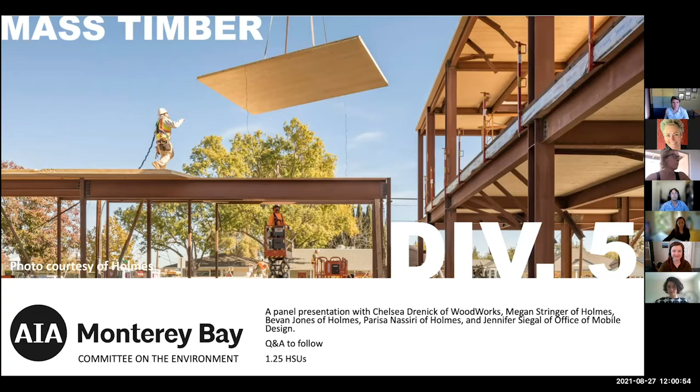I'm really excited today about our panelists. All are exceptional leaders in the world of mass timber who will speak to their knowledge of these wood systems. I've asked them to focus on the residential and small scale commercial sector, but also on its sustainability and safety benefits. Our hope with this series is that we can write more robust specs that specify low emitting materials, low carbon materials, durable without harm to the environment, and energy and resource conscious. Our previous lecture on green specs with Ann Hicks Harney gave an amazing overview on how we should approach our specs and listed many resources to assist us. Again, the link in the chat will take you to that talk.

Today, our panel includes Chelsea Drenick. Chelsea is a licensed structural engineer in the state of California. She received her bachelor's in science from Harvey Mudd College and a master's from Stanford. Chelsea spent 9 years in structural design consulting prior to joining Woodworks. Her experience is in a variety of sectors, including residential, higher education, and retrofit of existing and historic structures. She is passionate about sustainability and the use of wood as a building material to reduce the embodied carbon emissions of structures.

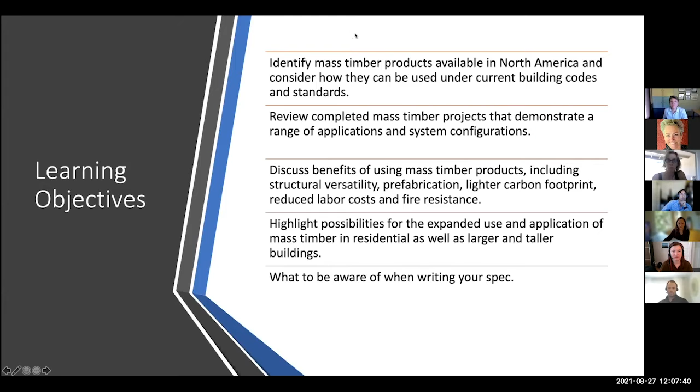Yes, excellent, thank you. Hello everyone, thank you for coming and thank you for having me. I'm Chelsea Drenick, Woodworks Regional Director for Northern California, Nevada, and Utah. Today we'll be discussing mass timber construction, products, performance, and design.

A quick word about Woodworks and what we do before I jump into my presentation. Woodworks is a nonprofit organization dedicated to helping project teams design and construct wood buildings. We do a lot of presentations like this, and I do lunch and learns for offices. All our presentations are AIA accredited, so please reach out if interested. We also do free wood design assistance to architects, engineers, and others in the building industry. Our goal is to help make wood buildings successful.

So as Libby said, I'm Chelsea Drenick, the main point of contact if you're in Northern California. My colleague Mike is in Southern California if you're located there. We provide assistance based on where designers are located so that we get to know local codes and get to know designers in our regions. Reach out if you have any questions, and I'll put my email in the chat once I'm done with this.

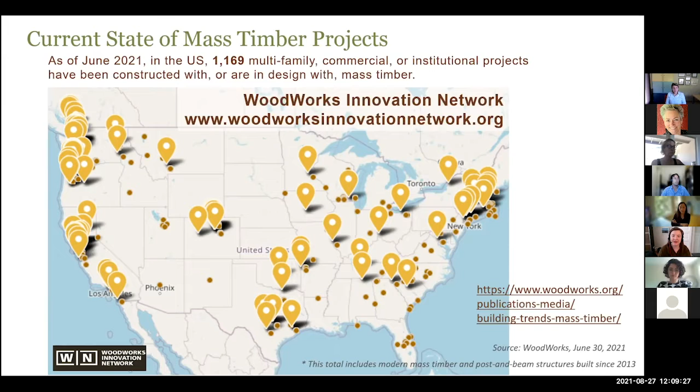Because we're talking about mass timber, I wanted to share the Woodworks Innovation Network. Our project assistance is confidential, but we wanted something that would allow folks to showcase their projects and connect with other experienced professionals. We're also tracking mass timber projects in design and construction—over 1,000 here in the US since we started tracking in 2013. Really exciting to see.

So I'm going to do a quick mass timber overview before turning it over to Holmes, looking at what mass timber products are and a few brief design considerations.

So, mass timber construction—I like to think of the delineation between mass timber and heavy timber. Heavy timber construction involves a solid wood member, a solid 8x8 piece of wood for a column, a solid 10x14 beam. Mass timber can have these same sizes, but it's made up of a number of smaller pieces laminated together using adhesives, nails, screws, or another type of mechanical fastening.

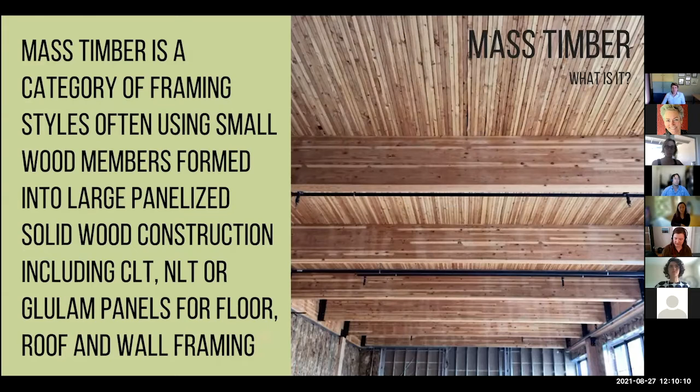We can use commodity lumber products, perhaps even lower grade products using smaller diameter trees, to still produce these large size elements—columns, beams, panels.

So mass timber buildings have a lot of different options for design. I think most common is post and beam, shown on the left, common for office buildings. Post and beam are typically glulam, but they could be solid sawn, LVL, or another type of engineered wood product.

Flat plate CLT is shown in the center, where we're using CLT as a two-way span, similar to flat plate concrete construction. Looking down this photo, you see there's no beams, only CLT and posts, so we have a tighter grid spacing here. We've seen it more commonly used for residential—the grid spacing shown here is 9 by 13.

It's a photo here of Brock Commons, a student housing project in Canada. On the right is honeycomb, more common in Europe—honeycomb or house of cards style construction, where both the vertical bearing systems, those walls, and the horizontal decks, or floors and roofs, are all mass timber.

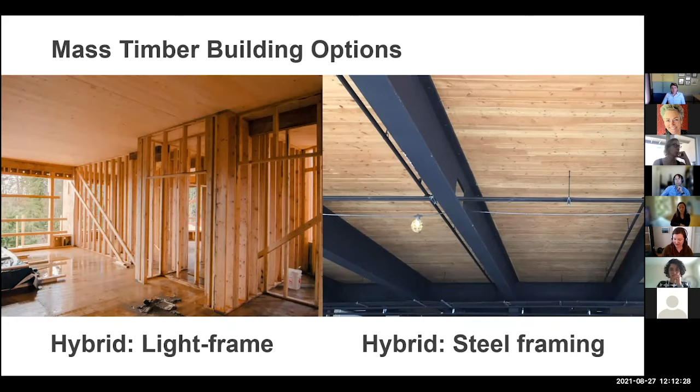All right, so of those four framing styles, we saw a number of products and introduced those briefly as well.

Glue laminated timber, glulam, are posts and beams typically of these buildings. Very simply, 2x glued together, then planed down. It's been around for 100 years. We use it in light frame construction for those longer spans. It can be hidden in a wall, then we have an industrial grade typically, or it's exposed in an architectural grade. So very common, as I said, for the posts and beams.

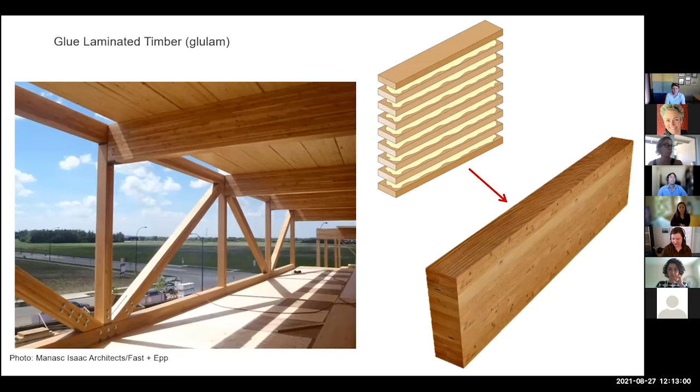Nail laminated timber, NLT. This is a combination of 2x members, usually 2x4s, 2x6, 2x8, oriented on their narrow face, so the strong axis is in the downward direction. Multiple laminations laid up side by side, each nailed to the previous. We usually use these for horizontal applications, the floors and roofs, and we're always going to be adding plywood or OSB to the top face so we can have that in-plane shear capacity.

NLT is really interesting because it can be prefabricated offsite or built on site. It's been in the code for a long time as mechanically laminated decking, very prescriptive, and it's very different from other mass timber products that are always prefabricated by a manufacturer. So NLT was more popular when the mass timber supply chain was less mature. Now there's a number of CLT suppliers across the country, across North America and Europe, so for larger projects it's much more cost effective to use a prefabricated panel.

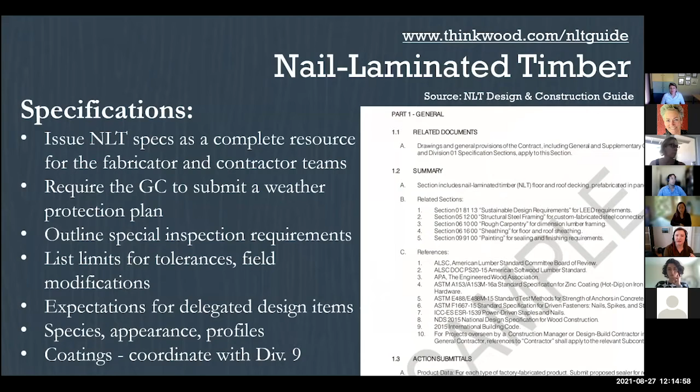All right, so I wanted to include this here, the nail laminated timber design guide, free from Think Wood. I can put a link to this in the chat as well. If you're interested in nail laminated timber, it's a great guide that goes through design considerations, and it also has an example specification at the end.

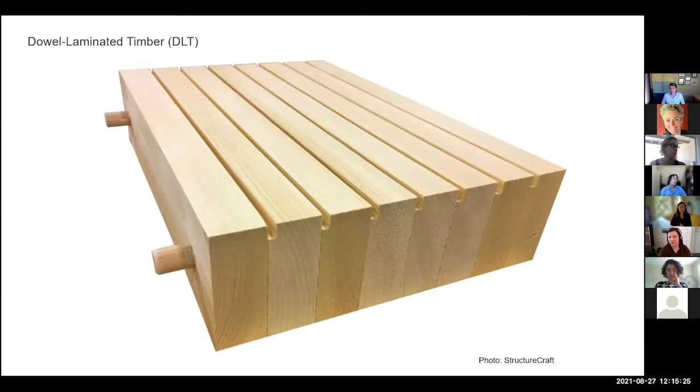Dowel laminated timber, DLT, is very similar to NLT in terms of members that make it up, 2x vertically oriented. The difference here is instead of nails, we're using hardwood dowels to mechanically fasten these laminations together. So no glue, no nails, just wood. There is one dedicated DLT manufacturer in North America, and that is StructureCraft. This is not something that can be easily built on site.

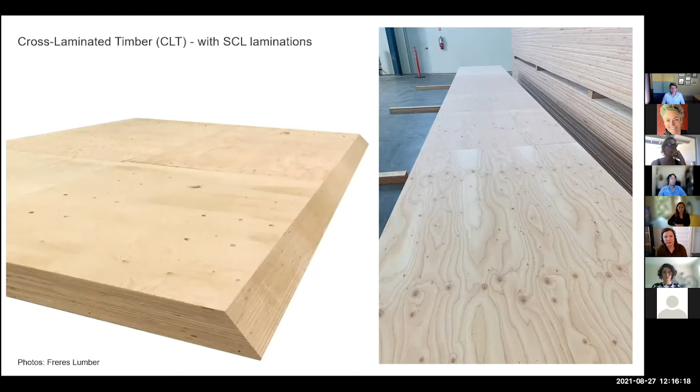A cool thing too is there's now CLT with structural composite lumber laminations. This is a product from Freres Lumber up in Oregon called Mass Plywood Panel, MPP for short. So basically really big plywood, layers of plywood glued together to make these large plates. And they can also cut it and make beams and columns out of it as well. So it's a different finish, but still CLT per code.

The contractor said it was originally designed with a light frame for the floors, using TJI joists, with a 14-month schedule. When they switched to MPP, it was cut down to a 10-month window. The contractor, Scott with Garnet Point, has talked about this project a lot, and there are some great webinars online if you'd like to learn more.

Back to our typical CLT with solid sawn pieces. CLT is typically formed by taking 2x boards side by side, laying them down, putting adhesive down, and then the next layer is cross-oriented, 90 degrees to the first, and so on, usually with an odd number of plies: 3 ply, 5 ply, 7 ply. The outer plies run the long direction, the strength axis, while the other direction is the minor or weak axis. So we do have strength in 2 directions, unlike NLT and DLT.

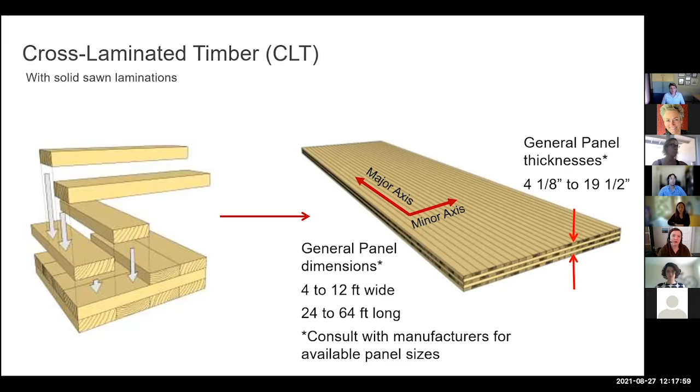That's how we can have that flat floor plate construction that I showed earlier. But in one direction, you're always going to have a shorter span than the other.

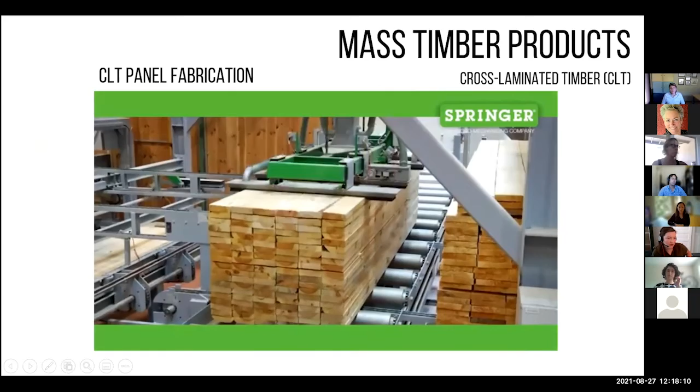I have a cool video here to show you how CLT is made. We're starting with a commodity lumber product, this is 2x, and the first thing they do is finger joint them end on end so we can have longer panels, typically 40 to 60 feet long. These longer pieces are then cut to size. Each CLT panel is made for a specific location on a specific project.

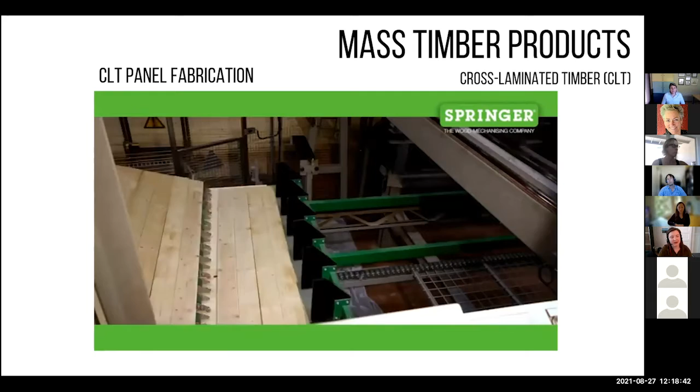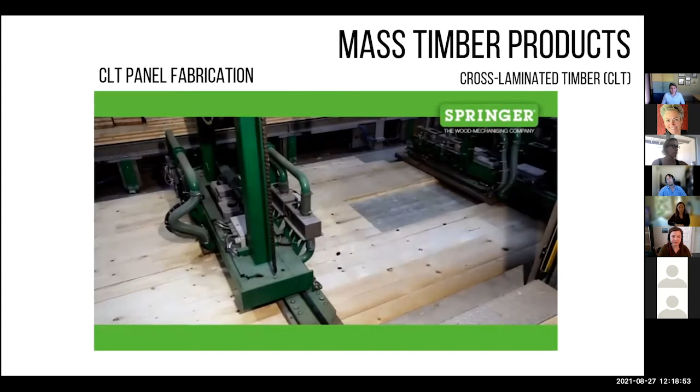Here they're putting those plies into place, then getting the adhesive on for the second layer. Here there's a diaphragm opening, probably for an MEP penetration, and you can see the specific size of the panel made for a specific location. Then it gets pressed and goes through the planer, so here we're going to have a 3-ply panel.

Noted panels are about 4 to 12 feet wide, 40 to 60 feet long, and that depends on the manufacturer, since each manufacturer has a different size press. So it's important to engage with manufacturers early on if possible. If not, make sure there's room for adjustment once a manufacturer is selected.

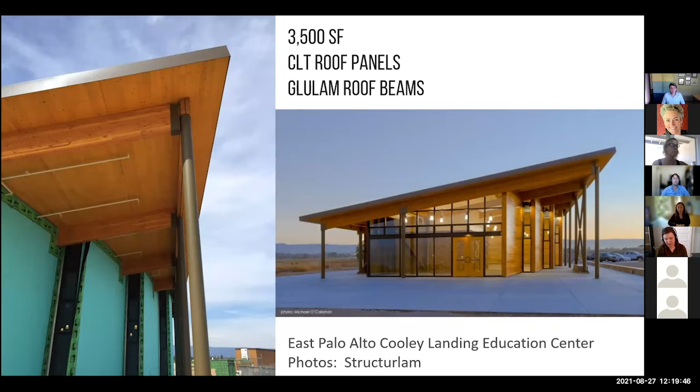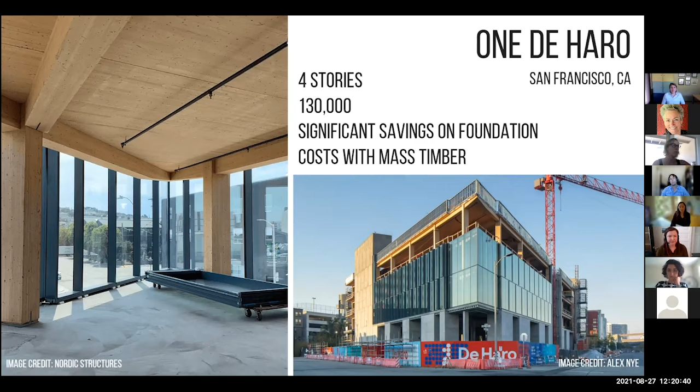Another local project here in San Francisco, very close to opening, which is cool. It's a 4-story office building, 3 stories of mass timber over a 1-story concrete podium. I like to show this one because one of the main reasons they went with mass timber was significant savings on foundation costs. Mass timber is much lighter weight, so comparing it to a concrete building, they were able to reduce their piles by about 50%. Very cool, and a good option for poor soil sites.

Talking about connections: these will include a lot of small diameter self-tapping screws, along with proprietary or custom fabricated beam and column hardware, kind of a new vocabulary of connections. There are lots of different shapes and sizes for these timber self-tapping screws. I was on a project site recently, and they had like 40 different sizes of screws, a bit too many I think, but it's kind of amazing all the different screws that are used. There's also an ever-improving market of tools to install these longer fasteners more easily and accurately.

Things to think about are shrinkage - think about that beam shrinkage, we don't want it to accumulate over the height of the building. And also fire design of connections, which we have a lot of experts here from Holmes to talk about as well.

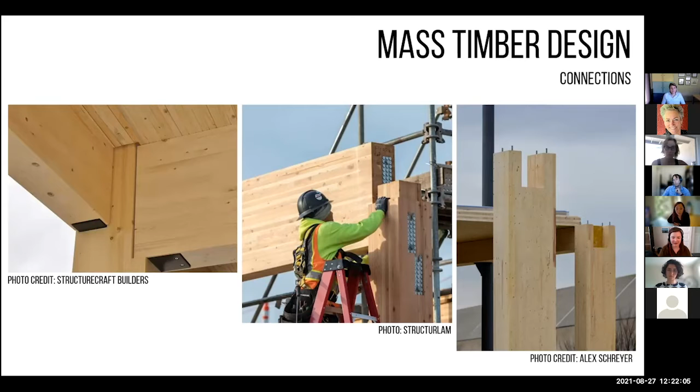Lateral systems - code process turns slowly. So we're working on getting CLT shear walls into the code, and there are design provisions, but there's no R value yet, so we're almost there. There are some projects using CLT shear walls, depending on an open-minded jurisdiction and a performance-based design - seeing them on some smaller projects. But typically for larger buildings, for office buildings, we're seeing steel or concrete used. One thing to consider with these is flexibility in the detailing for tolerance difference between the materials. Or for residential, smaller projects, light frame shear walls - our typical wood shear wall design works great as well.

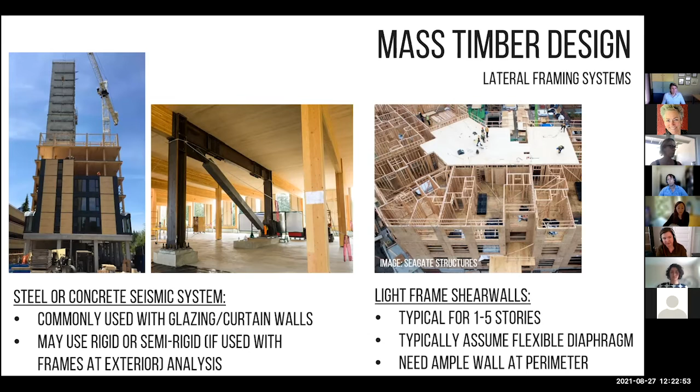The exciting thing is for CLT, recently released code - the SDPWS, special design provision for wind and seismic, the 2021 version, does have provisions for using the CLT as a diaphragm for seismic loading. So we're still going to have a surface spline here, plywood spline connecting the panels. That's not adopted by the CBC yet, but we are seeing a lot of jurisdictions allow this approach.

All right, acoustics - so lightweightness of CLT panels. It works for us for structural design, more efficient seismic systems, and the construction of the building - lighter weight, smaller foundations. But it works against us for acoustics. So we won't just have a bare CLT panel - typically we're exposing the ceiling and then we have finish on top. Part of the reason for that too is it's a softwood product, CLT - you don't want to leave that top surface exposed. As soon as someone starts wheeling a chair over it or walking across it with boots, it's going to be damaged. It's a strong material, but it's not super durable for that.

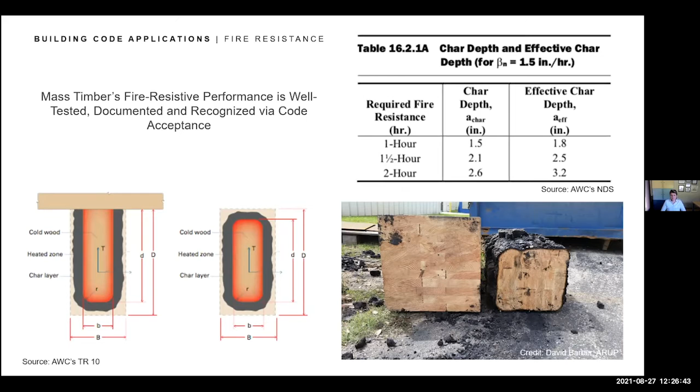So that's kind of a context for what projects will look like, what the products are. I kind of just wanted to touch on why we want to use mass timber. What are the benefits here?

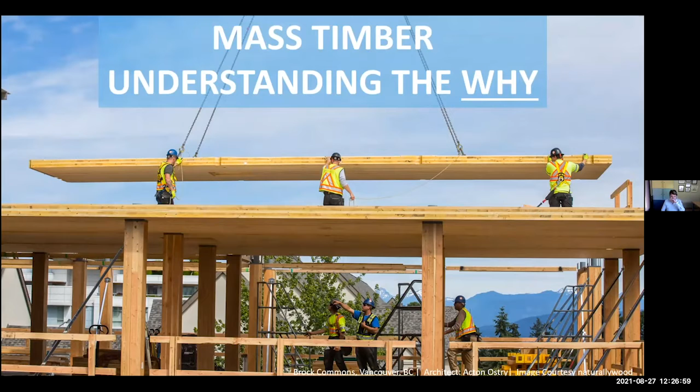Our global population is increasing. Where do we house everyone? Where will they work? How will climate change impact where people can live and work? So we need more buildings, we need more housing. We know that here in California for sure.

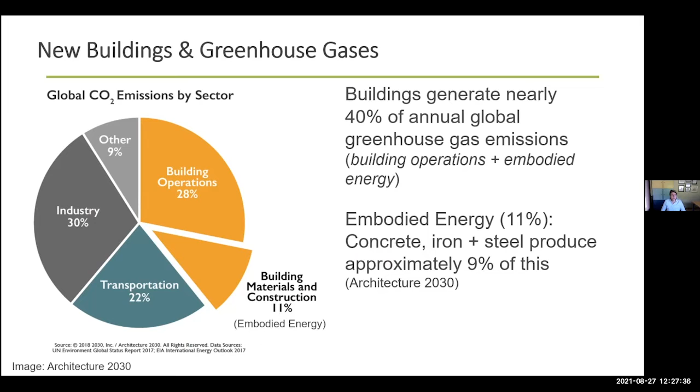Buildings generate nearly 40% of annual global greenhouse gas emissions. That's what we're seeing in the yellow pieces of this pie here. 28% is building operations, 11% is embodied carbon emissions. Embodied carbon emissions is when a building is built, how much CO2 is released due to its materials and construction.

Operational emissions are only improving with greener grids, more efficient heating and cooling. Embodied energy is not insignificant, and it doesn't have to be this necessary evil of building a new building.

So one thing that can help with that is wood. Wood is 49% carbon by mass or weight. In other words, approximately 50% of this wood is carbon that was in our atmosphere, contributing to global warming. It's now physically converted into a solid form of wood and put into the building. Whole building life cycle assessments typically show wood buildings as a way to reduce the embodied carbon footprint of a building.

This is a long and complicated discussion too. I actually did a talk yesterday at AIA California on wood and carbon and some vocabulary around that. So if you're interested in more, that will be posted shortly to the AIA California website.

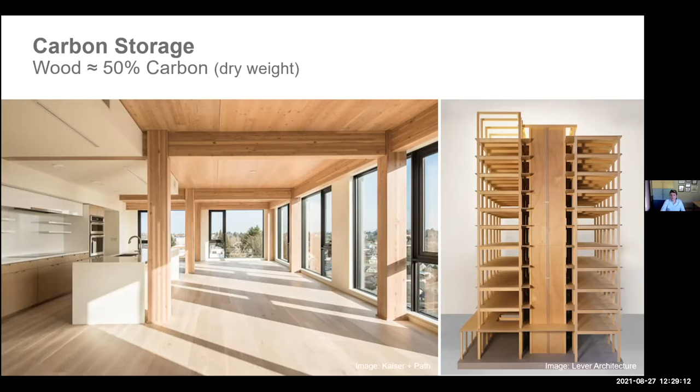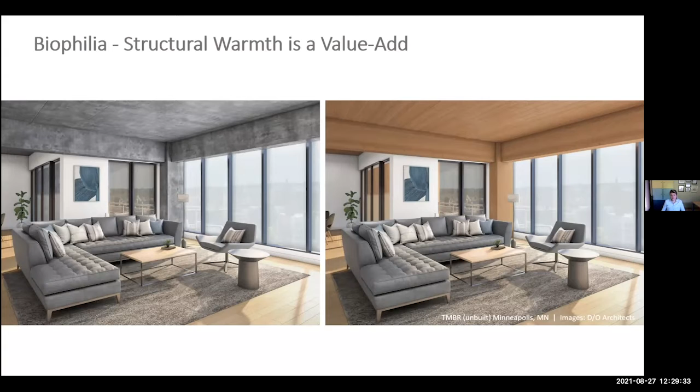Construction impacts. We know labor availability is a challenge right now in the construction industry. Mass timber is a way to integrate off-site construction. Then the crew on-site could be smaller, and we're creating more jobs offsite in a more safe work environment.

This point is tied to the previous. Compressing construction schedules will reduce the requirements of labor on site, requiring less time of folks on site. Time is money, mass timber helps with this. It requires a lot of coordination up front, but then when it gets to site, it's like a set of Legos or IKEA furniture. It goes up very quickly.

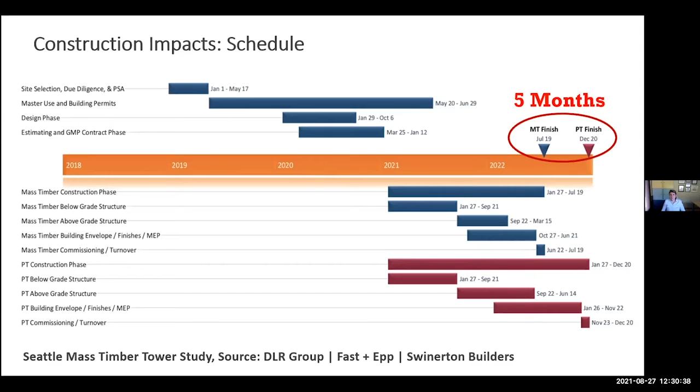So those are sort of the market drivers that we see for mass timber. I talked about construction efficiency and speed, construction site constraints for infill or urban infill projects. I mentioned Project 1 in Oakland, how they could install things directly from the truck. Secondary drivers, I think depending on the project, these secondary drivers could be primary drivers: carbon reductions, structural performance, lightweightness, especially important for poor soil sites.

We have some checklists, mass timber design and cost optimization checklists, on our website. On the 3rd page is a summary table of benefits of mass timber. I'm not here to say mass timber is right for every project, but if some of the benefits ring true, it might be worth exploring. Go over that with your clients.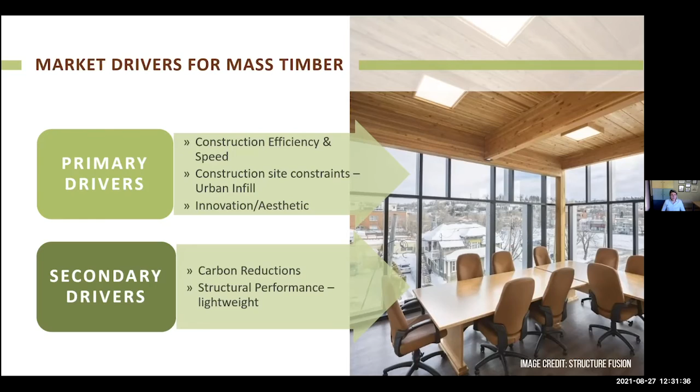All right, so where is mass timber going, particularly here in California? That is taller. Prior to the 2021 International Building Code, IBC, wood buildings, either light frame or heavy mass timber buildings, were limited to 5 to 6 stories based on occupancy. So 5 stories for residential, 6 stories for business.

We know that Europe kind of started this tall wood movement. So to catch up, a tall wood ad hoc committee was created here in the States to explore and push forward new code provisions. What they did is 5 full-scale mass timber fire tests in a multi-story apartment building that were conducted in summer of 2017.

The key to these tests that they wanted to prove was that they could get burnout of a fire without collapse. I mentioned charring earlier, how it protects the integrity of the wood. That's what these tests prove, that the contents of these apartment buildings could burn, the mass timber chars, and the structure remains standing, that these fires go out on their own.

Given the success of these tests, the ad hoc committee proposed 17 revisions to the 2021 IBC to include new tall wood construction types, and those were all passed and included in the 2021 IBC.

The California Building Code, the CBC, has an intervening code cycle where additions are made to the current code, and so they adopted these provisions early. They were passed unanimously on August 13th, 2020, and they were published January 1st of this year, and became effective July 1st. So there are project teams across the state already working on design of projects using these new provisions.

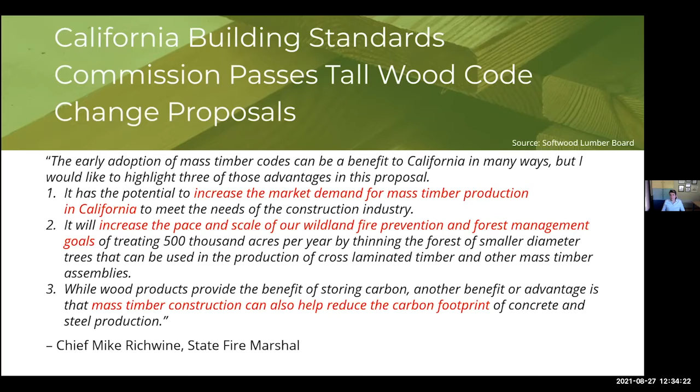As we get into these taller buildings, we're reducing the number of new concrete and steel buildings. So these are the new provisions, and I think Holmes is talking about this more. I just wanted to introduce these, the types.

Type 4A goes up to 18 stories, kind of based on Brock Commons, which was the 18-story student residence hall in British Columbia. For Type 4A, all the wood must be covered with non-combustible protection.

Type 4B goes up to 12 stories, somewhat based on this project in Portland that hasn't actually been built, Framework. Some of the wood, mass timber, can be exposed.

Type 4C allowed up to 9 stories for business occupancy, 8 stories residential. This is the Carbon 12 project that is in Portland, and it's also up to 85 feet in height. All the mass timber can be exposed.

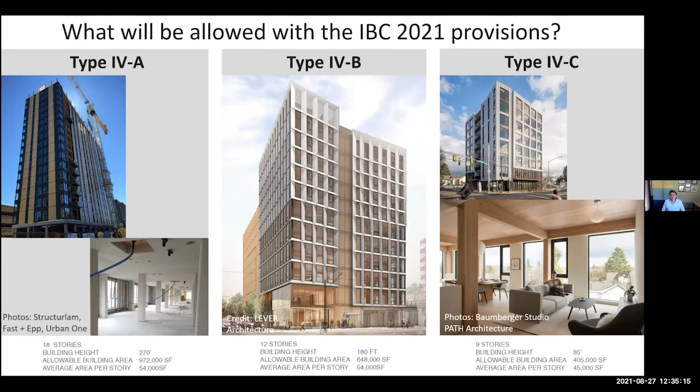And also, if you're working with a contractor that hasn't installed mass timber and is nervous about it, we have been providing mass timber mock-ups to carpenter union training centers around the country. And excitingly enough, there is a new one in production right now that's going to go to Buena Park, California, which is very near Anaheim. So any contractors, carpenters that are union can go to these training centers and learn how to install mass timber. More information on our website if you'd like to connect to anyone with that.

Cool, thanks. So for the next about 20 minutes, we're going to cover how we can achieve the mass timber construction, what are the lessons learned that we had, and a few case studies that we're going to cover at the end.

So exactly what Chelsea mentioned, up until July this year, the maximum number of stories in height that we could go for mass timber construction was 6 stories for office building, 85 feet in total building height. With the new construction types, we were allowed to go from 9 to 18 stories in building height for 4C, 4B, and 4A, with limitations on the amount of exposed mass timber we can have and the extent of non-combustible protection needed on the mass timber elements.

Going to the next slide, all the construction types that we can use for mass timber construction would be 4A, 4B, 4C for heavy timber, and both 3A and 3B, and type 5 construction type, both A and B.

We had a question about whether we can use mass timber in a type 3 construction. And the answer is yes, just because the code language basically says that for the interior building elements of a type 3 construction, we are allowed to use any material that is permitted by the code, noting that the exterior walls of type 3 construction are not allowed to be mass timber.

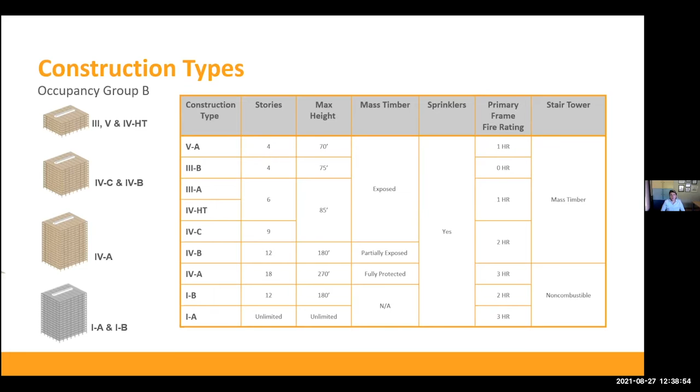Going to the next slide, these are the 3 new proposed construction types. 4A allows us to have 18 stories of office building, up to 270 feet in height. The building needs to be fully protected with non-combustible protection, most likely gypsum board protection directly attached to the mass timber, to achieve 3-hour fire resistance rating for the primary elements that we have.

The next construction type that we have is 4B, which allows us to have 12 stories, 180 feet in height. This construction type allows us to have 20% of exposed mass timber on our ceilings. If we have, for example, a residential unit, that would be 20% of the ceiling within each dwelling unit. Or if we want exposed walls, that would be 40% of exposed walls in the unit.

And then for 4C, which is also a 2-hour rated construction type, we can have everything exposed—all of the beams, columns, and the ceiling can be exposed mass timber. After the compartment tests that Chelsea mentioned, as a result of that, we had these new construction types.

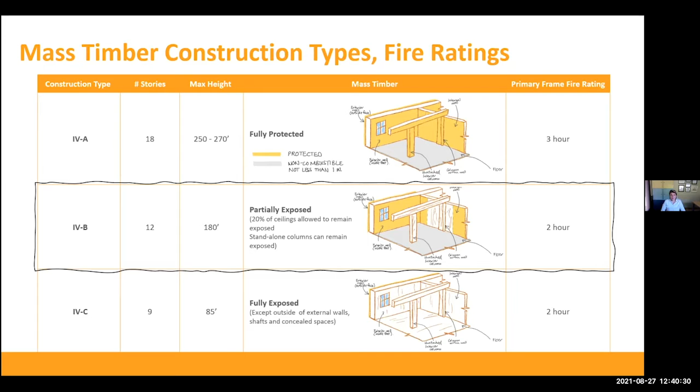There has been a series of new tests at the RISE Institute in Sweden, in collaboration with the American Wood Council, which basically resulted in new code proposals for the next cycle of the code. With that, the type 4B construction type is proposed to have up to 100% of exposed mass timber on the ceiling area. This code section has not been approved yet—it's still going through the process—but it's basically the result of the test data conducted a few months back in Sweden. And with that, I'm going to pass it to Megan.

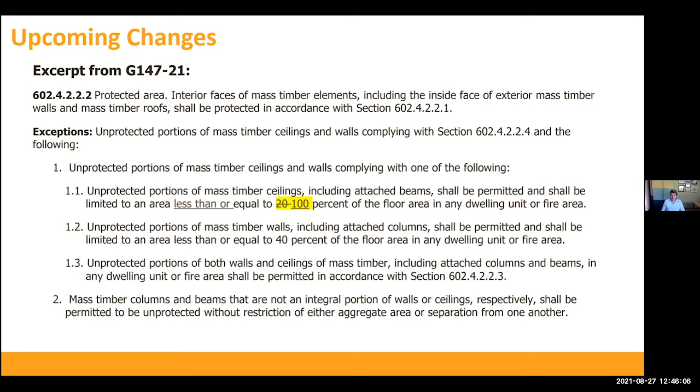And to reiterate what Bevan was saying, it depends on your structural load case, and a lot of times fire isn't the governing design for your element. You could have your element sized for, say, vibration, and it already meets the required fire layer—so it depends case by case. But let's move on to some mass timber lessons learned that we've uncovered on a lot of the projects we've been working on.

So I think the biggest one, and Chelsea definitely touched on this, is around grid and different manufacturers and capabilities. If we're looking at grids for mass timber, any type of larger 30 by 30 grid, that's more in that optimum office range we typically see, easy to program around. When you get into grids like that, you're looking at a mass timber option that has beams in both directions.

So you're going to have joists in one direction that pick up the CLT span, then spanning to girders. With that, you can play around with how you're stacking your joists and how they're framing into your girders to allow for some cavities for MEP integration, which we will talk about shortly.

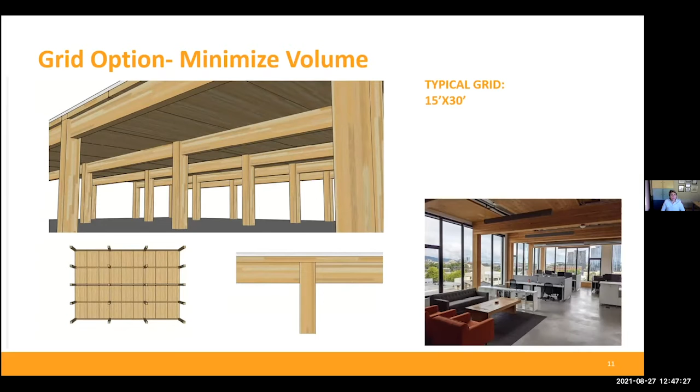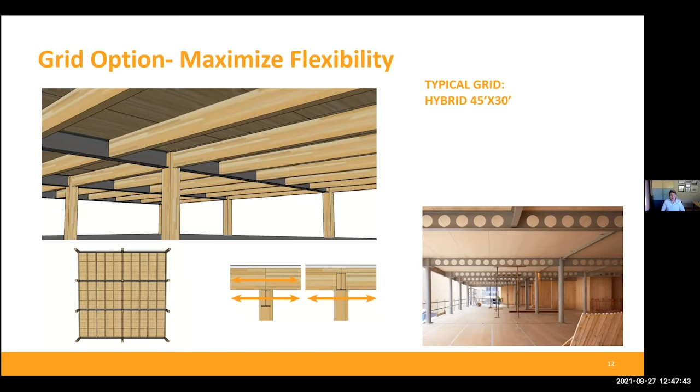Another grid option is where we're really trying to minimize the timber volume, where you're looking at more of a one-way system with just beams in one direction. Those grids are typically more in the 15 by 30 range, and that can vary. With any of these options, you can start to introduce other structural materials and come up with hybrid systems, whether introducing steel or even concrete beams to help you span further, allowing for a bit more flexibility in your program.

Then the other grid, as Chelsea mentioned, is what I usually refer to as a point-supported option. It's really just your CLT supported on columns only, so there are no beams. Again, you're going to be limited in your grid based on your panel dimension, and typically manufacturers can fabricate a panel about 10 feet wide, so that sets your grid in one direction, and you can span a bit further in the orthogonal direction. But when you have this many columns, you're usually looking at more multifamily residential or residential options for this type of system.

One play on that is a system that's mainly been used in precast, but has also been used in mass timber, and we've used it on projects, is integrating what they call a delta beam. It's an upturned steel channel shape that you then cast concrete around, and it does allow you to open up your floor plans a bit and span further while still having a relatively flat soffit.

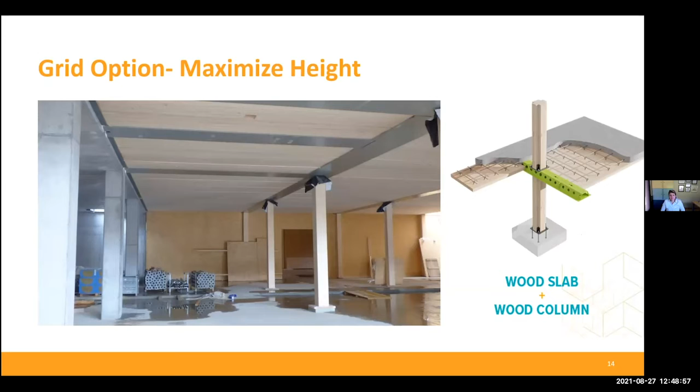This is looking regionally, specifically the West Coast, showing how there are different suppliers offering different things. You can see in the chart that panels are typically up to 10 to 40 feet long, with a few manufacturers having capabilities to go higher than that. Understanding this when you're starting to lay out your grid for your projects is really key to coming up with an efficient mass timber system.

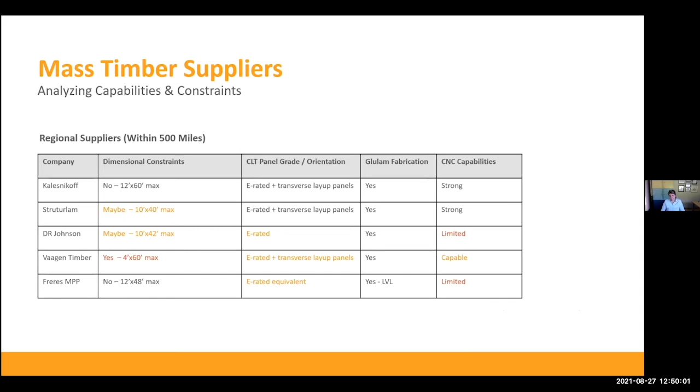The next biggest lesson learned was around integration, a bunch of different types of integration here, and first up is really MEP integration. We've found that the most successful mass timber projects, the ones able to keep the mass timber exposed through construction, are ones that integrate the MEP systems in with the floor system.

This is just a couple of ways you can do it, there are a lot of different options even to this, these are just some common ones we've seen. We're also seeing that MEP integration wants to happen way sooner in design than it typically does in typical projects, so you want to get all of your openings coordinated early so that it's getting fabricated into your panels in the shop. Here are some pictures of options for that in construction.

The two on the left are really just illustrating that gapped CLT. So you leave a gap between your CLT panels that does allow for your small services to run over your beams. You do span that with plywood, so you're limited to the spans there for how big that gap can be, but it's definitely a great option for integrating your services.

And then the image on the right is showing a lot of the electrical boxes that are going to be in the floor, which get cast into a concrete topping slab. So that hides a lot of that within the slab.

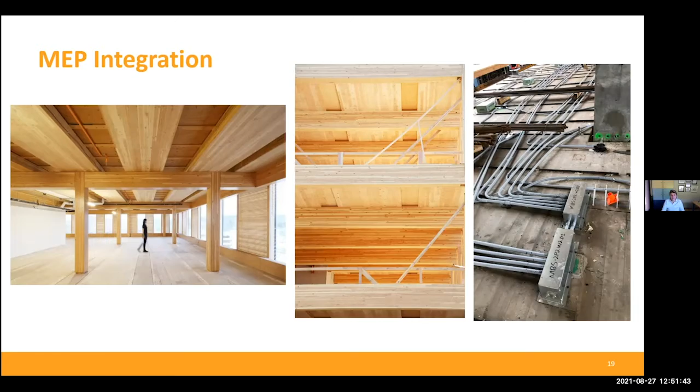The next integration is really all about project team integration. And I think you'll see with these mass timber projects, there's a lot of different players on board that are really helpful in the iteration of, for this example, detailing.

So this is really just showing the structural beam-to-column detail for a project, which we'll talk about in the case studies, where this was going to be replicated many times, and we needed to put the column in bearing. And so you're seeing that first sketch with the architect on the left and how that detail had been refined throughout the process, whether that was more feedback from the architect, general contractor, and even the manufacturer, and what their capabilities are in terms of fabricating these types of detailing.

And then with that, I think is the structure fire integration that we've been talking about. But Bevan, did you want to speak a couple words just on this? Yeah, sure, Megan. Thanks. Just back at you on what you just mentioned.

I think particularly with this sort of design, particularly as we're looking at the advantages of mass timber, the kit-of-parts process of components, manufactured off site and shipped to site, sort of like a Lego set, as Chelsea mentioned. Being able to see the benefits of speed of erection and using a lot less labor force on site, the devil's in the details really, and working through a lot of these details at the front of the design.

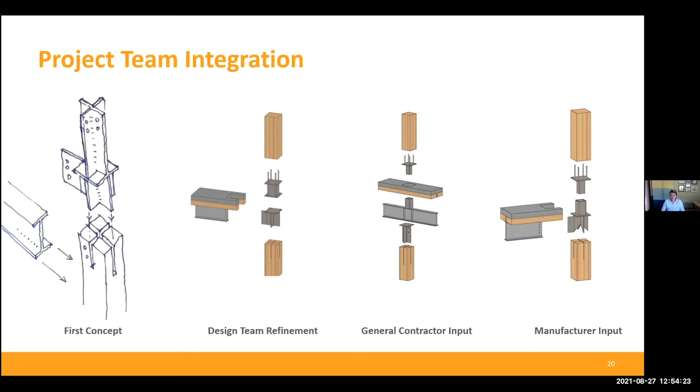So focusing more on the fire side of things in terms of the structural integration, there's been some recent additions to the code language around protection of connections. It's been fairly silent in the past, even in conventional steel or concrete industry, in terms of protection of connections. But with regards to wood, we typically use a lot of steel connectors, and it's important to understand the performance of those steel connectors when exposed to fire, and also how we're protecting those connection details for these mass timber buildings to maintain their structural performance in a fire event.

So there are some simple calculations that can be done that are referenced within the California Building Code as an example, which will refer you to the National Design Specification, where Chapter 16 outlines calculations for fire resistance of mass timber elements. Part of this is quite often because we don't have this sort of years and years of research and development and testing, a lot of the connection details are fairly ad hoc. As part of this, where we have complex details, we have this opportunity to use performance-based design to validate the performance of those connection details in fire.

Understanding where we may need to protect pin or bolt connections with dowels or intumescent coatings, where we may get concrete providing protection, and where we can utilize embedment of those details, essentially concealing them within the mass timber elements and using the mass timber as protection for those steel elements.

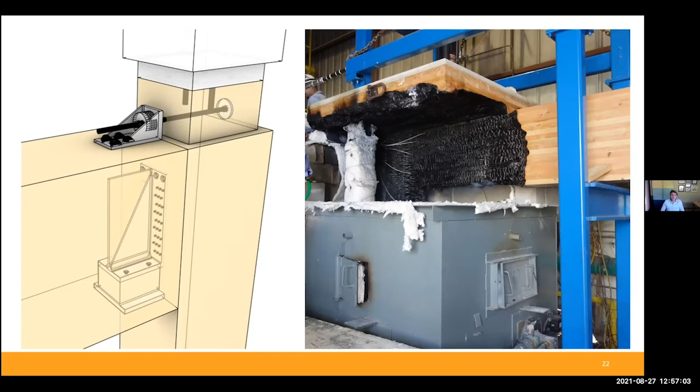I'm going to now pass on to Parisa, I believe. Oh, sorry, Megan, to go through some case studies. Yeah, I think we'll skip over this.

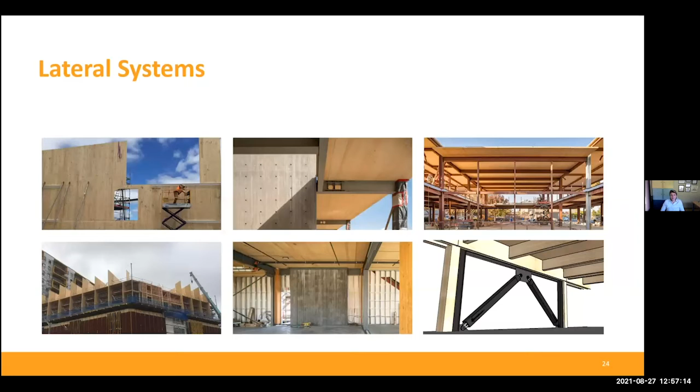This is just talking about different lateral systems that we've been seeing in these buildings, which Chelsea kind of already touched on. When you're starting to push the spans of a mass timber system, you do in certain cases need to pay attention to vibration. So being able to work with your engineers to develop vibration models and figure out if you're trying to target a higher vibration criteria, that we can achieve that for you.

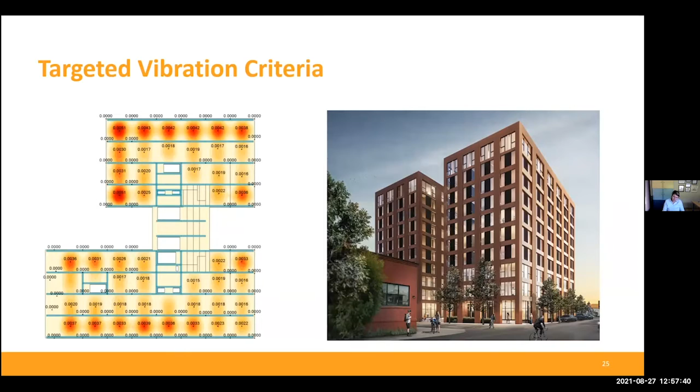We within Holmes have built a timber optimizer tool that we've found really helpful to iterate between all these different design constraints we've been talking about today, like fire rating, span, height, and all of that, and be able to really iterate quickly between different options. We'd definitely be happy to share that with you.

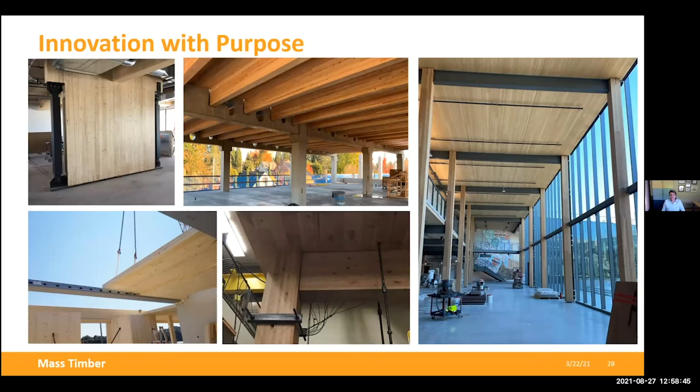With that, we've been seeing lots of different unique solutions for these projects depending on the project drivers. It's been kind of fun as an engineer to come up with these different solutions, but just noting that we really haven't been seeing a one size fits all approach.

I think this is back to you, Bevan, to go over some rough project examples. I think Chelsea covered a lot of this. This is really just that mass timber question Robert had asked before: it's a structural material or system. It can be applied to a lot of different construction types within the building code, for anything from low-rise now to high-rise buildings.

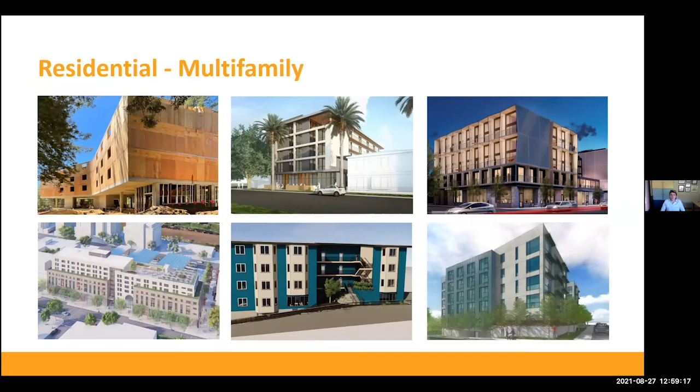Residential and commercial applications are primarily what's been used at the moment, but we're definitely seeing manufacturing facilities and others that are really looking into building more sustainable structures and achieving their sustainability mandates.

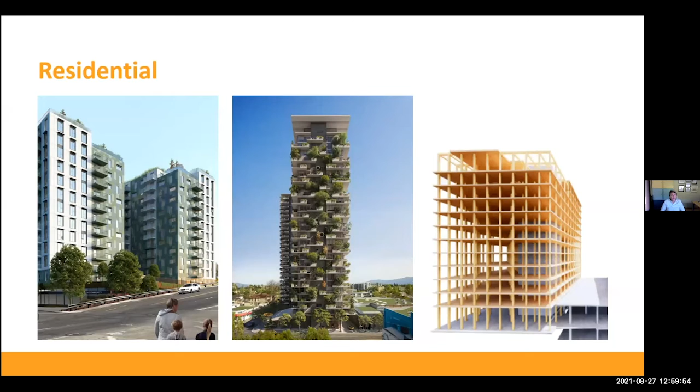One big high-level point here is that using this structural system really starts to lend itself to a similar structural system that can be applied across low-rise and high-rise buildings. You can look at panelized or hybrid systems using that same system for low and high-rise buildings, and start to see the efficiencies on a site that may have both, using the same structural system, same craneage, same delivery method, leading to a lot of efficiencies in construction.

Awesome. So now let's just jump real quick, since we're running tight on time, on some constructed case study examples.

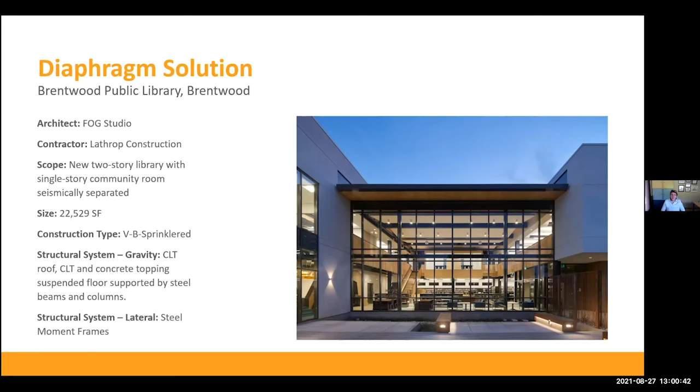First up is a public library building in the Bay Area, completed around 2016 with Fog Studio and Lathrop Construction, about a 20,000 square foot library. Again we're seeing a hybrid structural system since lateral systems haven't caught up to having mass timber lateral systems, so this is CLT floors and roofs with steel moment frames as the lateral system.

I really like these pictures because they show the minimum amount of people it takes to erect these buildings. Really hitting home on a point Chelsea made earlier, it only took about 4 people to erect the CLT for this building.

This contractor had never worked with CLT before, but was very open for the challenge, and the panels went up way quicker than originally forecasted in their schedule. We barely made it out to get some final photos of them lifting the last panels in place.

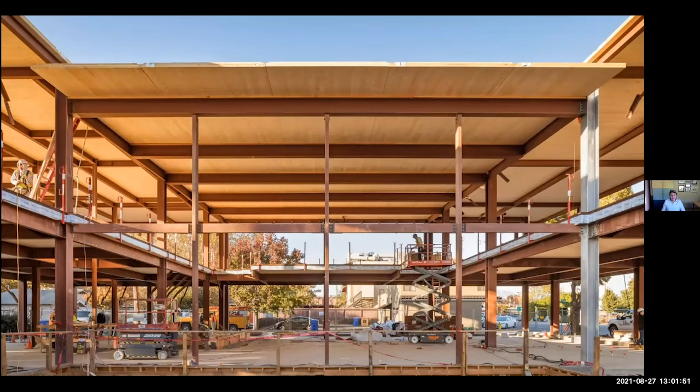We utilized the CLT as a diaphragm for this building, at least on the roof level. On the left you're seeing plywood splines tying the panels together. We did have a small concrete topping slab on level 2 to handle the heavy stack loading, but we achieved some fun cantilevers, and it's a really beautiful aesthetic in the final product.

The last case study is North America's largest mass timber building built so far. This building just opened this year, finally, after some COVID delays, but it's a very exciting project to have complete now.

We were able to permit this as type 3B construction, so primarily all of the structure is unrated, which definitely helped with the aesthetic and kept the cost down.

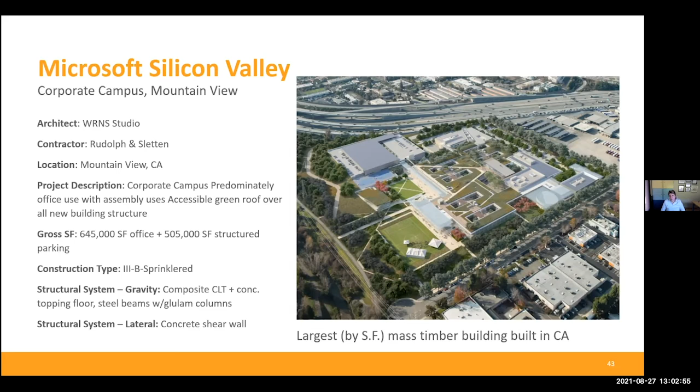This project is a bit unique in that it is a composite concrete and CLT slab, made composite with the concrete so it could span further. That's supported by steel wide flange beams and glulam columns.

I think a big story of this project was just the sheer volume of timber that needed to be procured at one time, back in 2017 when we went out for bid.

To limit the owner's risk, at permit we left open what type of mass timber the project could be. We permitted either NLT or CLT, with the option for anyone to submit a bid for an alternate floor system as long as they met some of the project performance criteria.

That meant our mass timber supplier was brought on board very late, after we had already submitted for permit, which did require some rework of connections and designs to accommodate that.

The project ended up going CLT with Structurlam. We did get very competitive bids out of Europe, but from a sustainability story and worry about lead times for a replacement panel, the owner selected Structurlam. At the time, this project alone was 1/3 of their annual production capacity, so it was a large volume of wood required at one time.

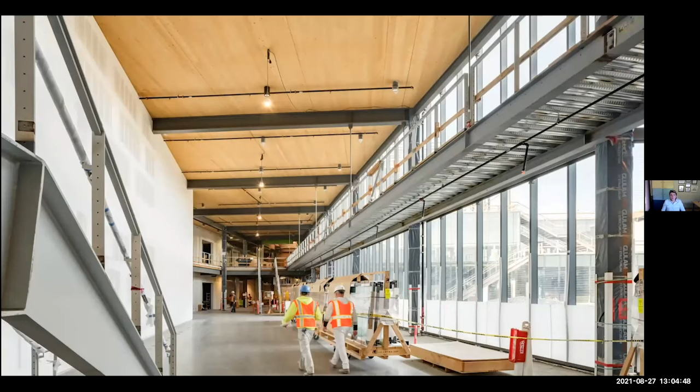Megan, can you answer Carrie's question? Oh yeah, sorry, quick one. Going back to the smaller scale projects, we're really eager to test this out. If in certain locations you just can't get a crane all the way out into a certain site, it's just not going to be possible.

What do you think is the largest size panel that construction could use without having to have a crane lift it? So if you're talking about a house or a small outbuilding, ranch outbuildings, in a practical sense what size panel can people actually manage?

That's a good question, I don't know if I know the answer. We've done some small scale projects, but I was thinking there's got to be some other smaller scale equipment that people can use to lift the panels, limited by capacity. You could easily get the density of wood and back calculate the max weight and panel size you could lift. But I don't know if anyone else on the call has more insight.

Jennifer and Chelsea point out that a forklift would be an option in certain situations. I think it would be limited to whatever equipment you can get out there that's able to do any lifting, whether it's a scissor lift, a Manitou, or other equipment—whatever is an appropriate lifting mechanism. From that, you could get a blank panel transported to site, which can then be cut into smaller sizes liftable by that equipment.

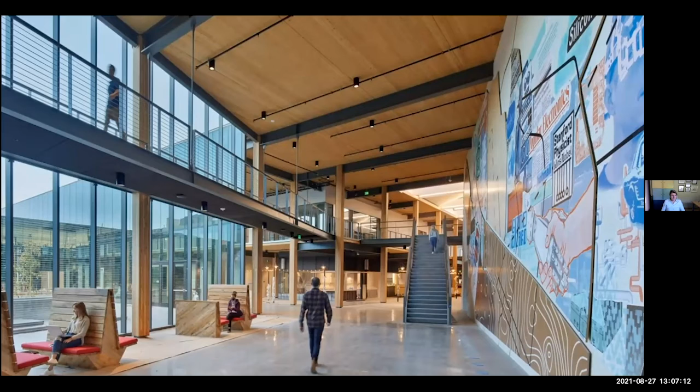Quite often it's about making the most efficient use of the press, as Megan outlined on the Microsoft project. The presses are making a certain size panel, so it's most cost effective and efficient from a delivery perspective to structure your structural system around what that panel is able to manufacture, whether it's half size panels or full size panels, because that really starts to create the best cost efficiencies.

There are a couple manufacturers who specialize in smaller panels—Vaagen Timbers is really interested in doing residential work, and they have 4-foot wide panels which are easier to lift into place. I think Binderholz also has a 4-foot wide option as well. So they're already building in that efficiency for smaller panels.

Great to know, yeah, great to know. I can also mention we've done a couple of high-end residences using CLT for their roofs. I can definitely ping those design teams and see if they had any feedback from the contractor on how they were erecting their panels.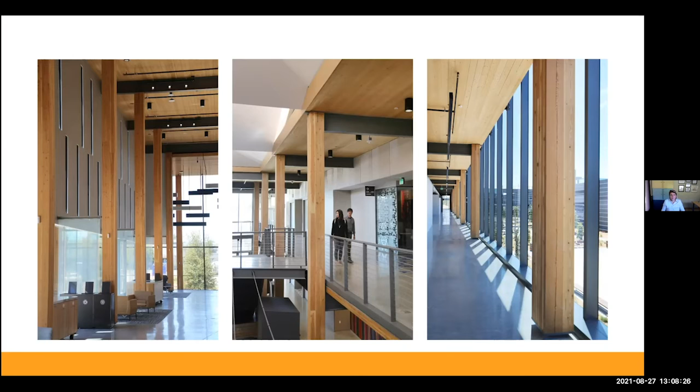Yeah, so I think that's really it—just cycling through some final photos. Being in a mass timber building, you kind of get it, you get what the hype is about and why it's been gaining so much traction. It does just have a really clean aesthetic. The timber that comes off the truck is kind of your finished product—you don't need to paint it or do anything else to the underside of that surface. That is really just your exposed aesthetic.

So with that, we can turn it over to Jennifer. I think you might have a few things to chat about before we get into the Q&A.

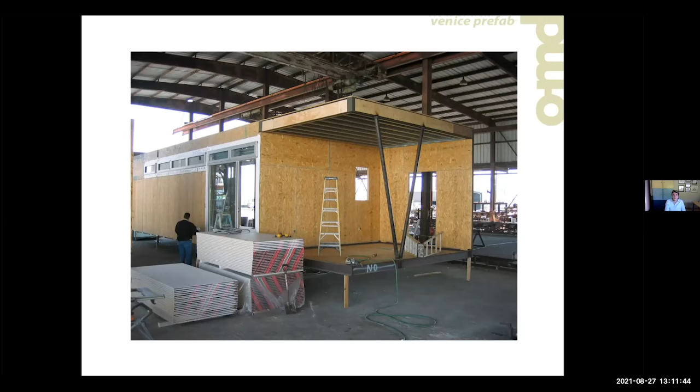Transportation and install is varied. Depending on the weight and size of the module, that determines the scale of the crane or lift you need. But in terms of design, there's really no limitations.

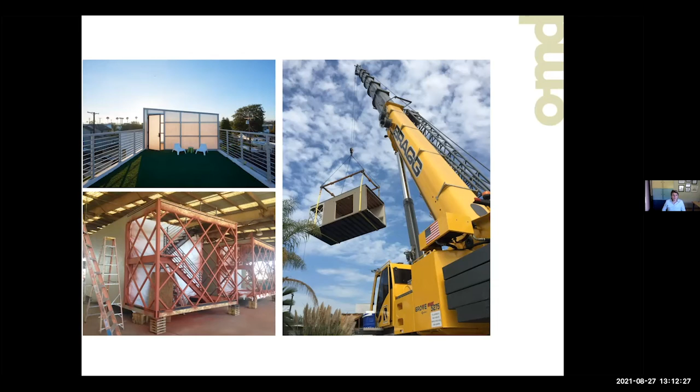All of the modular buildings we do are permitted with the state architect and inspected in the factory, which is a tremendous time savings of probably a third, and a much more efficient and sustainable way of building—about a third less material waste occurs in a controlled factory setting than on site. Here's a couple quick examples of work that Office of Mobile Design has produced over the years.

This was one of our first attempts. It became a show model here in Venice, with one continuous sloped shed roof at its highest point, an operable skylight, and thinking a lot about green materials early on—bamboo flooring, polycarbonate panels for insulation. Ultimately, this building moved to this location.

This is in Joshua Tree, and it became a fully off-the-grid home for a man who collects homes.

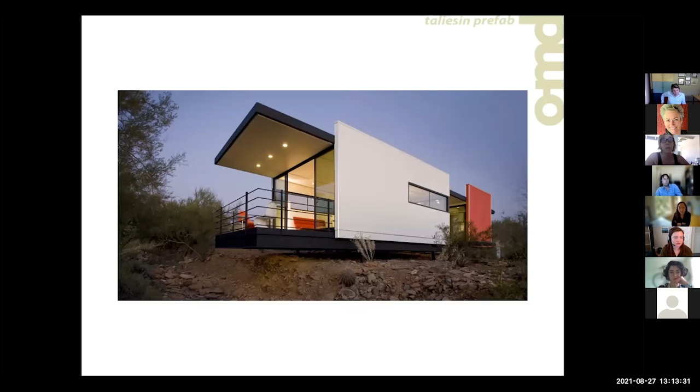This is also an example done with a group of students at Taliesin in Scottsdale, Arizona, the former architecture school called Taliesin. It was built with a steel chassis and a hybrid of SIP panels—structurally insulated panels—again another fully off-the-grid structure in the desert, and one continuous modular piece.

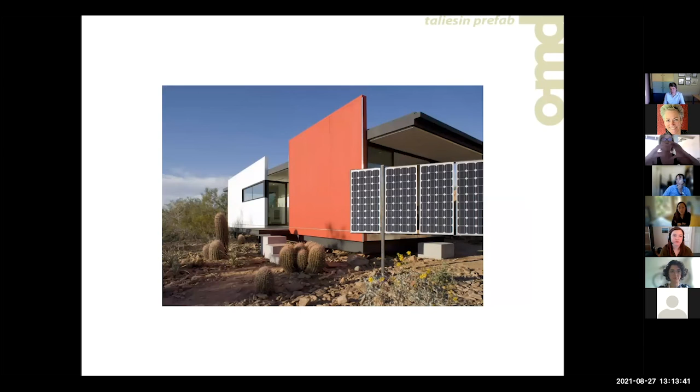The reason I'm showing some of these ideas is that it's an evolution for me of how I became interested in mass timber. This is what an infill of SIPs looks like in a steel frame.

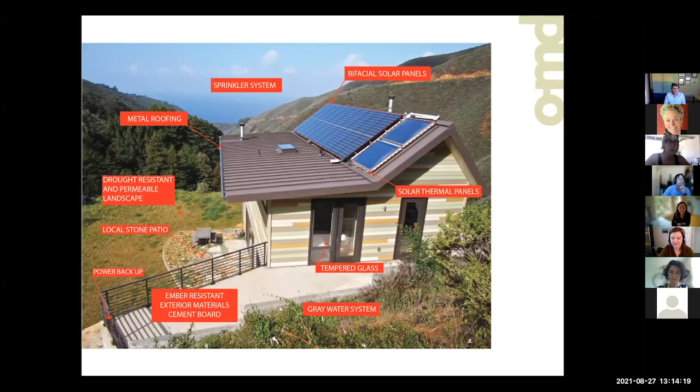Here's an example of a house that Libby's probably familiar with because she lives in it. That's in Big Sur—a SIP panel house built also to be fully off the grid, in a very remote and stunning location, with a variety of different materials that were sourced locally and installed.

That brought me to teaching at USC last semester, where I was asked to teach a studio on mass timber, which I had never worked with before. I was lucky to meet Megan Stringer, who was lecturing with the LA AIA through Holmes, and started to spend more time thinking about the integration of mass timber and modular construction.

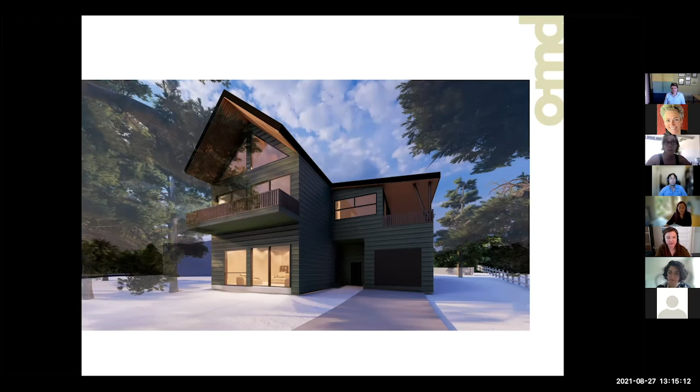This is my first attempt, a home we're working on in Big Bear. Shout out to one of my students in this group, Natalie Hubb, who's been working on this project with me in my office. It's made up of six mods, partial site built, and a mass timber roof, as you can see here.

What the mass timber allows me to create is a kind of alpine-esque feel with an exposed Douglas fir finish. The panels are coming from Vaagen, as was mentioned earlier by Chelsea, and everything's pre-channeled, pre-routed for my electrical that's in the cavity of this roof.

We've kept these mods below 12 feet for the economy of movement. So these are all 11 by 11, and then they come together on site. It's called set and stitch.

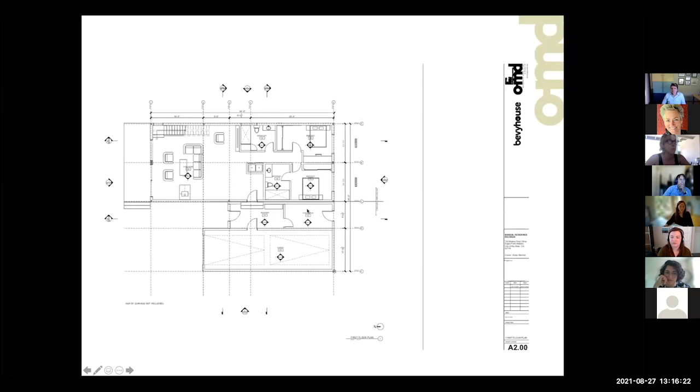So that's the first floor, and this is our second floor plan. We also have, as you can tell, one open cavity in the roof, so that there's a clear span within this building. The mods will come without a roof on them, so that the client will be able to enjoy that open space.

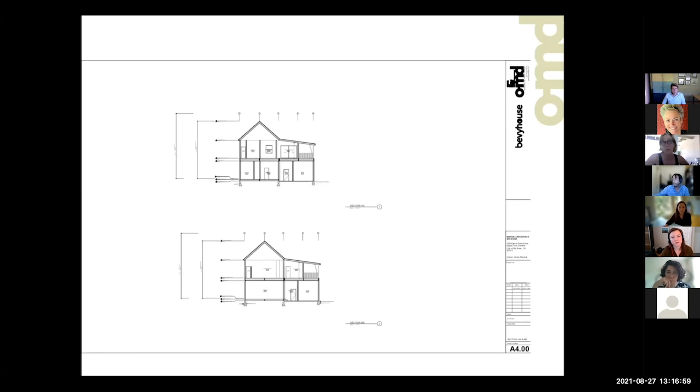The assembly, we expect to take place over the course of probably a week. The modules get set within a day, and then because it's our first attempt setting the panels on top, we're giving ourselves a week to complete. That's it.

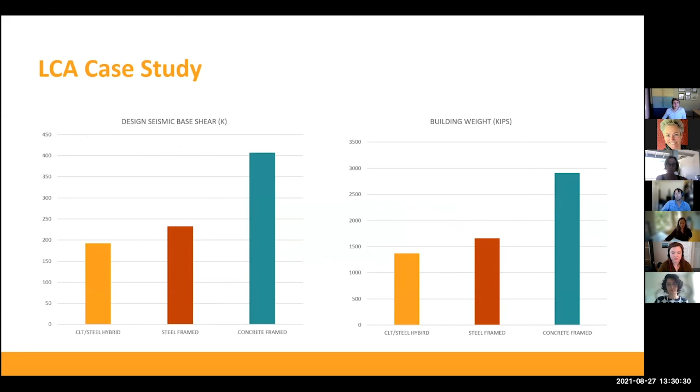So this was just a schematic level study where we were looking at a mass timber office building, whether it was a steel mass timber hybrid, comparing that to a steel framed structure with concrete on metal deck, or a concrete building. Looking at the correlation between building weight and seismic base shear, these mass timber buildings weigh less than their steel and concrete counterparts, so we have less seismic mass, less building weight, less foundations, and that translates into the embodied carbon side of things. Looking at global warming potential, the orange is the steel mass timber hybrid, and we're about a third of the impact of the concrete building.

These are just very simple studies that we do a lot of times early on projects when we're comparing different options. Once an option is selected, the spirit of LCA is to then work within that system selected to track your design decisions throughout the project and show reductions over time.

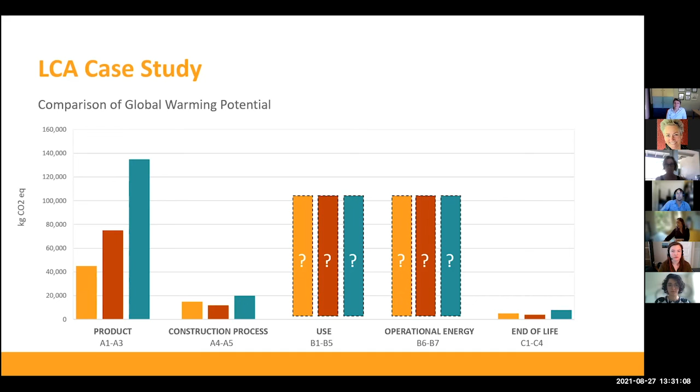Well, I think Buckminster Fuller would be greatly impressed, and you could answer his question as to how much the building weighs. So that's fabulous.